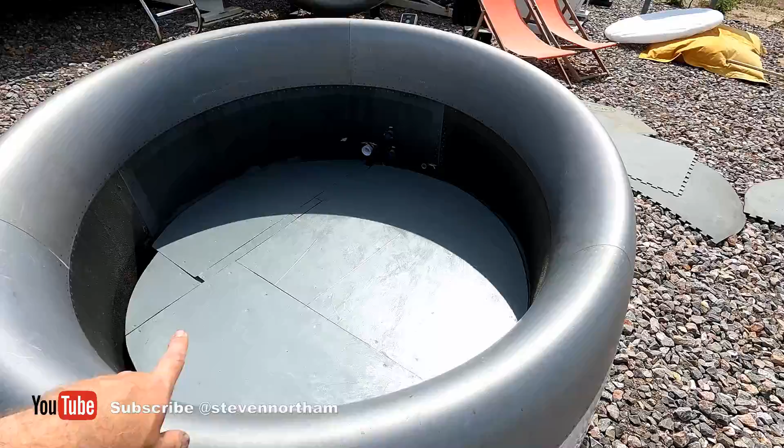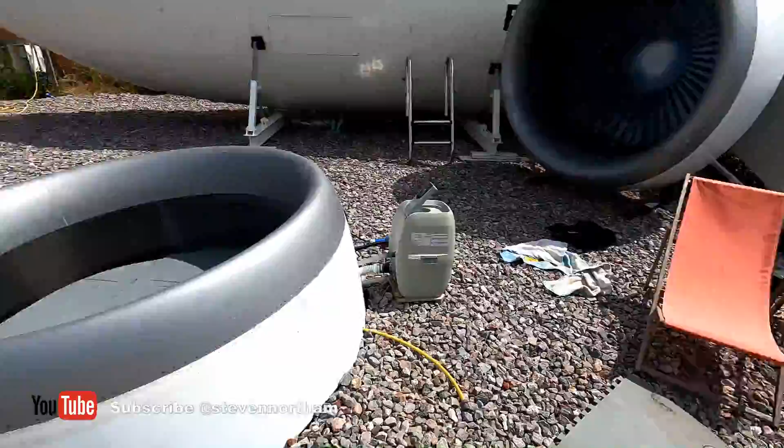Just starting to crack on, carrying on from the last video with getting the plane ready. I've done some weeding, cleared all the weeds, made it look snazzy. I've jet washed and cleaned up the hot tub, and cleaned up the jet wash bits and pieces. The plane still needs a blast, a bit of a clean. I've been sorting things out, painted the floor in there to stop it going rotten with any water that leaks on it, and I'll get the hot tub back in there and set it back up. That all seems to work fine, which is awesome. Just clearing up bits, and then I've been up on top of the plane.

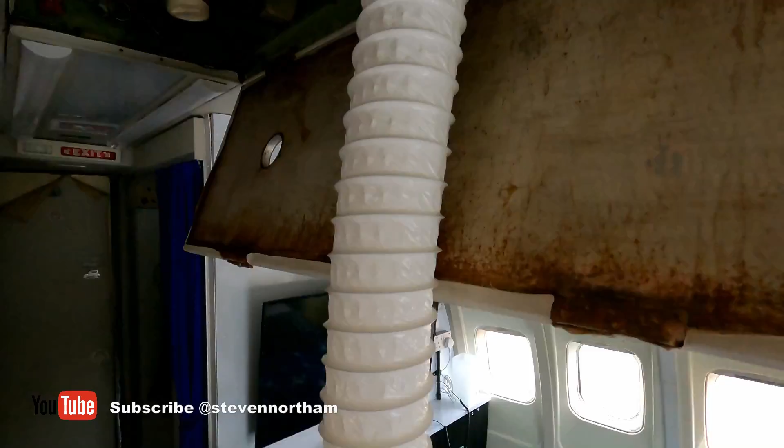One of the things I didn't do when we were filming the conversion was sort out the ventilation - hidden bits behind the scenes which weren't particularly interesting for the TV show. So I've put in a 100mm vent pipe with a mushroom vent. I've dropped the pipe in on top of the plane because it needs some ventilation, to get air flowing through it, especially if people use the shower. Luckily there was a nice hole already bored.

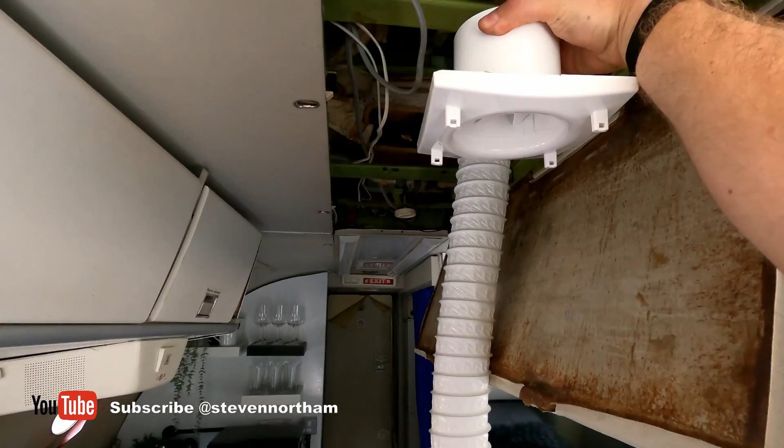Into the top of the plane, I assume for some sort of instrument which sat on it previously. I found nice little pipe adapters which fitted straight through the hole, sealed them in, and I'll put the extractor fan - just a Vent-Axia fan - mounted on the back here, sitting like that to give us a bit of extraction. There'll be a few more, probably a couple at the back and one at the front as well, just to get a good airflow through.

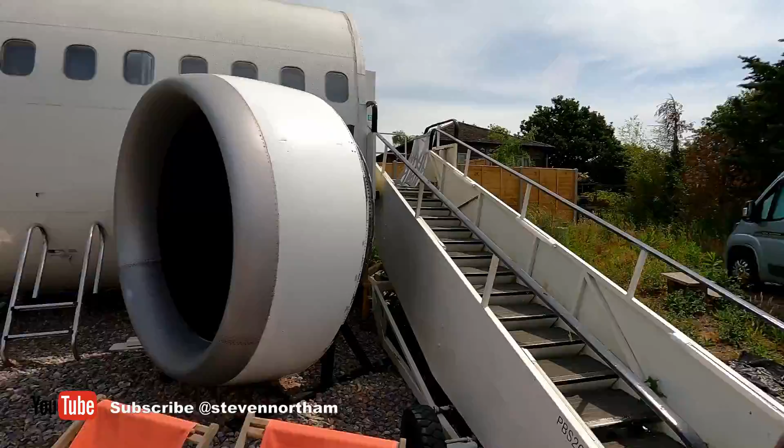Got the heat pump to go in, I'll probably do that in a second. Just really tidying up, sorting out and ticking off the list of bits which weren't done as part of the show, tidying up bits from winter which have been a bit weathered. Give it a good clean, get the hot tub in, and might be time for a beer in the sun in the jet engine hot tub. But again, I'll crack on.

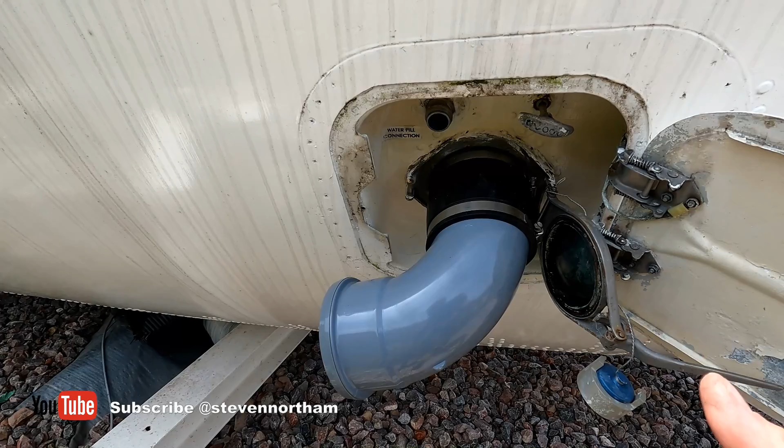In fact, I'll show you the toilet. I started the plumbing, and I have no idea if it's interesting to anyone, but I'll do a little video on it. So the toilet - this is where, when it's on the ground, they plug in and suck the crap out, essentially, I assume. Luckily it's about 110mm, which is the waste pipe size, so I've got a rubber seal around that.

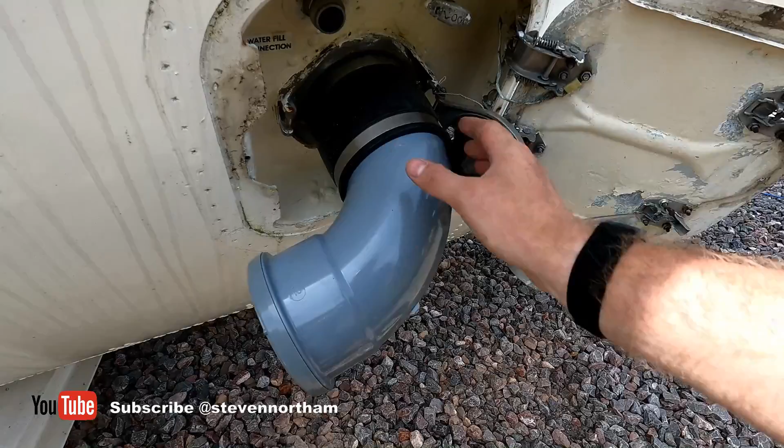That fits on nicely. There's a water inlet which I'm going to try and use for the flush system. So I have a solenoid valve which will flush water through, and that's quite nice and easy to keep water consumption to a minimum and hopefully get the toilet working as it should. But again, I'll vlog that as I start to strip it out and work it out in due course.

So the hot tub is now on, back in business. I have got to do the ladder because that's not fixed to anything - for the TV show it was just stuck there to look cool. So I need to make some little brackets at the bottom and top to get that secure. But I've cleaned it out, dropped the chlorine chemicals in, all that stuff. So the hot tub is back on, it's looking cool.

Obviously the sun is out today. It's going to look awesome once it's all done and sorted out. But time to crack on with the loo - that's my next project.

So another day. It's quite overcast today, which is actually quite nice - not so hot working.

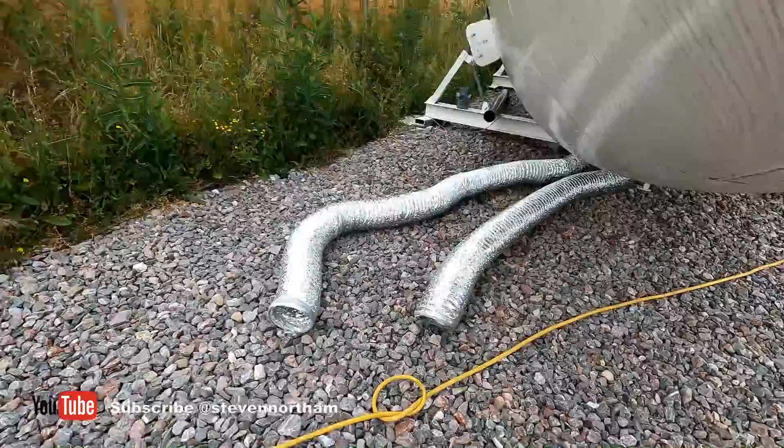I am cracking on with project plane toilet and other bits and pieces. As I showed you before, I've tidied it all up. The hot tub's all sorted, that's all working. I've moved the air conditioning heating system vents for the hot and cold out via where the landing gear used to be.

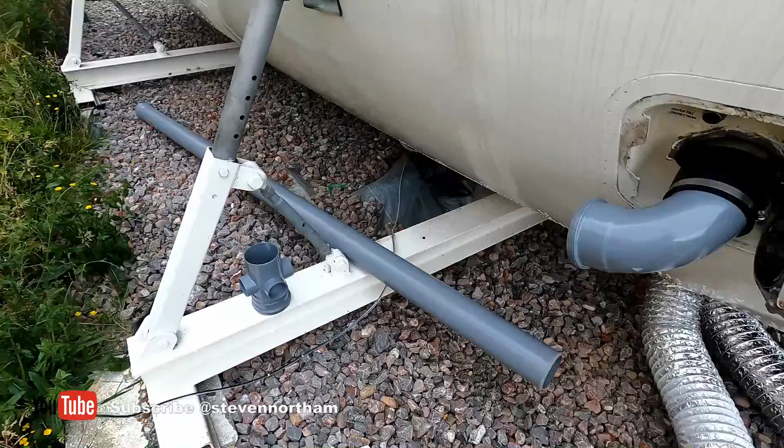So I'll mount all that nicely, trim these off, and then as I showed previously, I'm just starting to work out the loo. I've got soil pipe, which is obviously going to come out there. I think originally I said I was going to try and use the original flush valve inlet, but that's going to prove tricky because connectors for that cost an absolute fortune, with everything being on a plane. But piping I'm kind of sorting, and I'm working out a very butchered system to make this loo flush and function again, so I'll show you what I've done so far.

We'll try to work it out. I've turned the power off for a bit, so it's a bit dark, so I'll put a head torch on. It's probably going to flicker, I'm not sure.

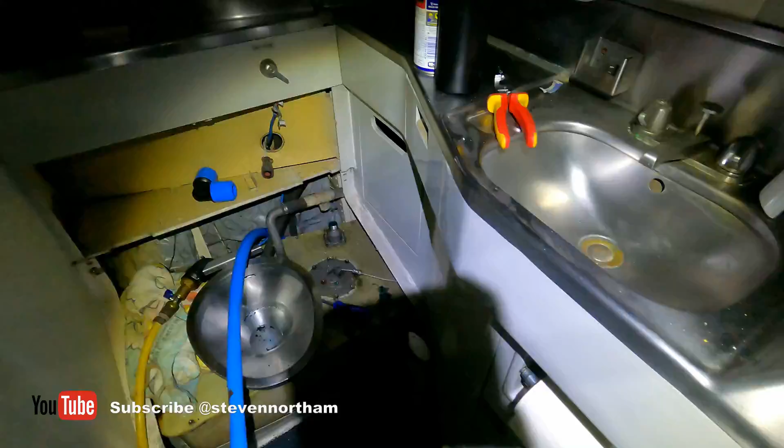So I've run a hose pipe in here to test it with water, and what I've done thus far, I've got a pipe that goes down to the hold, which would be the water inlet for the toilet, and obviously the sink as well, which I'll do shortly. I've hooked up a hose just to test it currently.

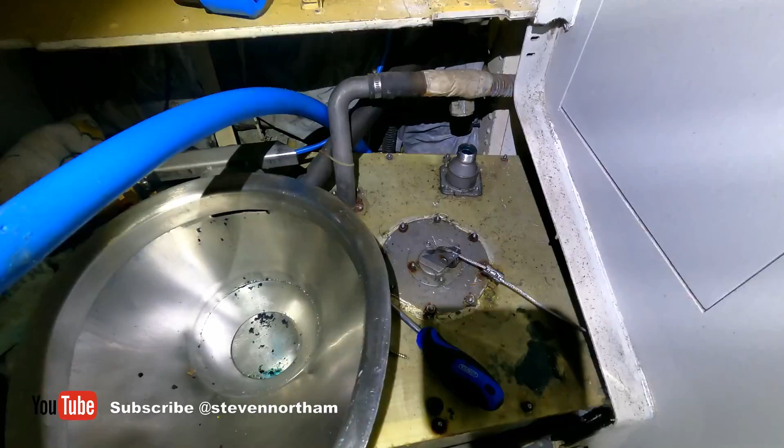Obviously I've stripped it all back and cleaned the pan a bit, it's very corroded, needs a good scrub still for some descaling. But basically the port over there is what goes to the outside where the water inlet is to flush it, and that flushes the entire tank. So originally when you use the loo, it stores it in the tank. When you're done, they pull the lever and it lets the contents out, and they pump it through with fresh water to clean it out.

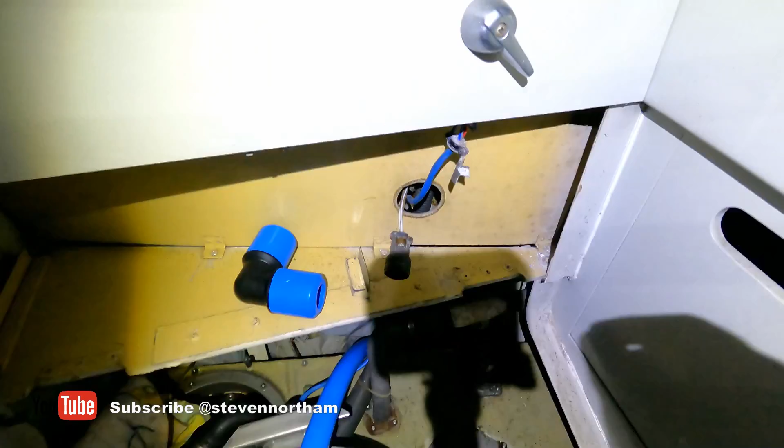So what I'm going to try and do is feed it with fresh water to the tank cleaning and the flush, all off a push button solenoid valve. Originally it was like that - it has a mechanical and electrical flush system which times it, so I can time how much water runs through the flush. But all I want to do currently, I'm going to move that pipe.

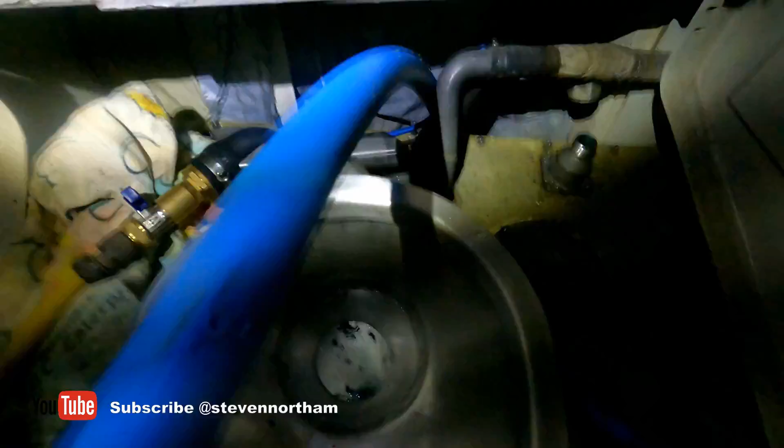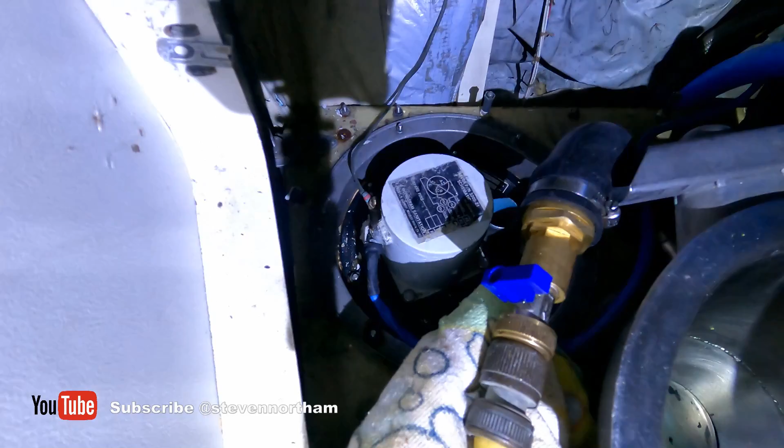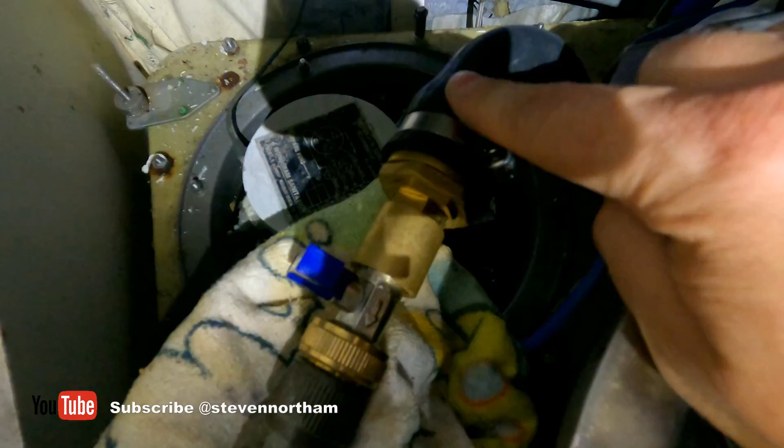I've hooked up, you can sort of see this without getting the camera in the way, a hose pipe to the back of the flush. Originally there's a motor in there, sort of see that - there's a pump which pumps water from the tank into the flush system, but I'm not going to use that, so I've taken it off this Jubilee clip. That goes straight into the back of the cistern. It should run water all the way around the pan and flush it down into the tank in theory.

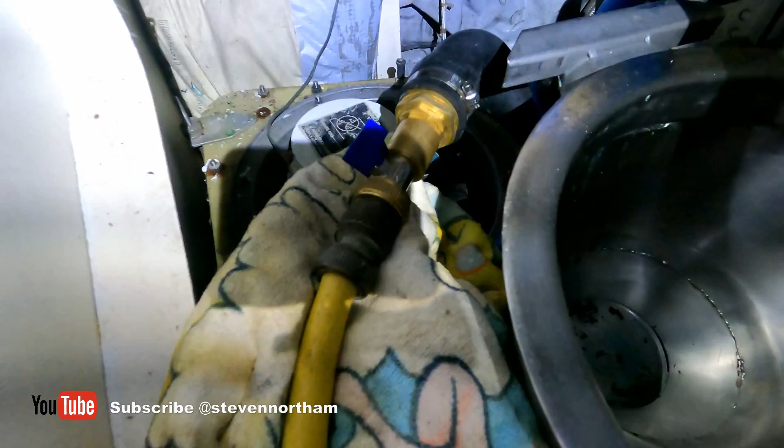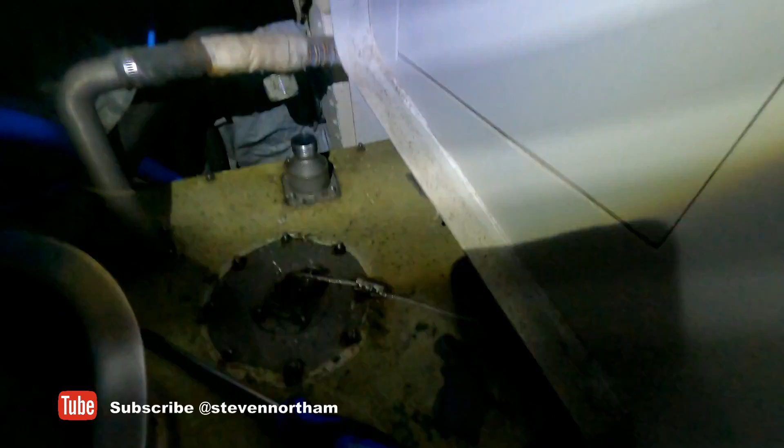I've no idea if that works, so I've hooked up the hose pipe with a valve. I'm just going to pump water through, test it, and then see if the release works the other end. There's a handle on the outside of the plane which pulls this lever, and that pulls up a valve at the bottom of the tank and empties the tank, in theory. So what I'm going to do is pump a bit of water around it, see if it flushes as such, and then see if it empties out the back.

If that all works, it should be quite straightforward to make the plane loo work again. So that's the grand plan.

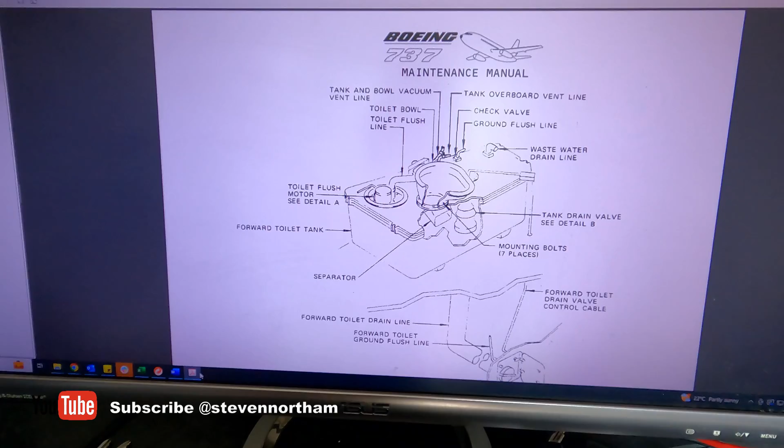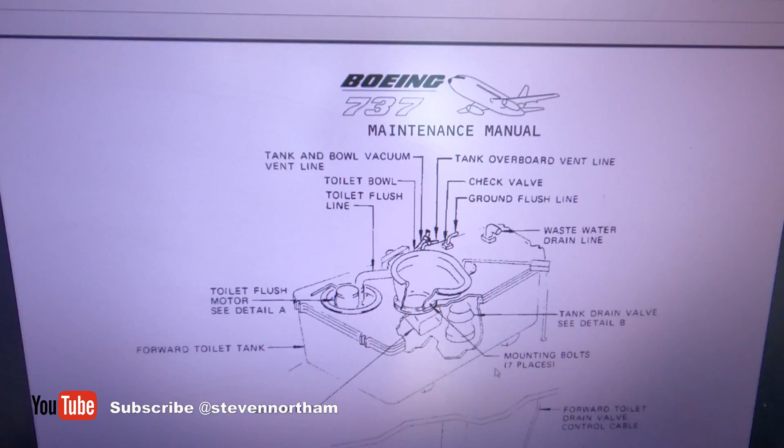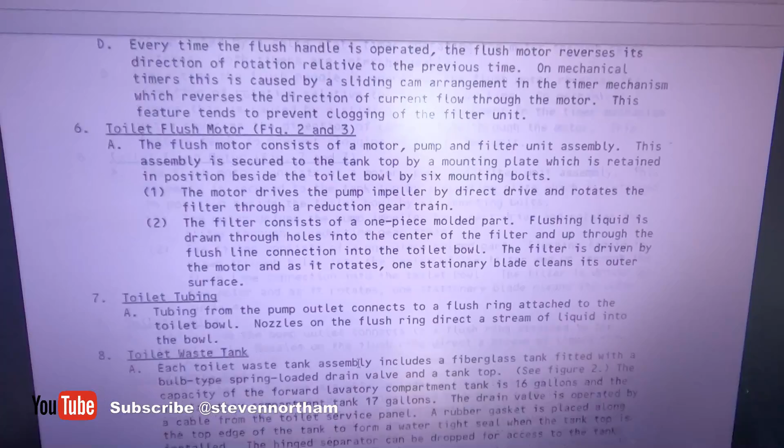So with the toilet, I was just pondering, would I be able to find any details on the internet about a loo from a 56-year-old 737. Turns out, with everything else, you can find anything you want on the internet. I actually found this on WikiLeaks - it's the complete maintenance manual for a 737-200, which has everything on, like how to fix it, the wiring. It's an absolutely colossal manual.

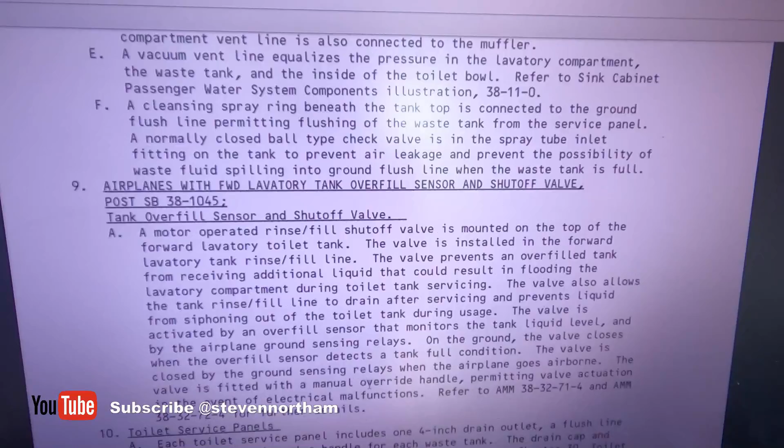It's got the flush system, but nicely it does have, scroll back up, the sort of details of the loo, the system, how it works, etc. I think it's got, yeah, like the flush, the whole lot. So that might make life slightly easier. But I'm going to go strip the cover off the loo, etc, and then start working it out now.

Alright, so I've turned the water on. It's not pissed out everywhere yet. So if I put a little valve on the hose pipe just to test it - it's leaking a bit, so I'll try and, oh crikey, always too, I don't want to flood the plane. But if I turn the valve, I've not put it on full blast because the water pressure is really high, which is good. It should flush the loo as such, so we'll just give it a little test. It looks like it's working.

It looks like some of the little outlets are probably a bit blocked still, so it needs a good scrub.

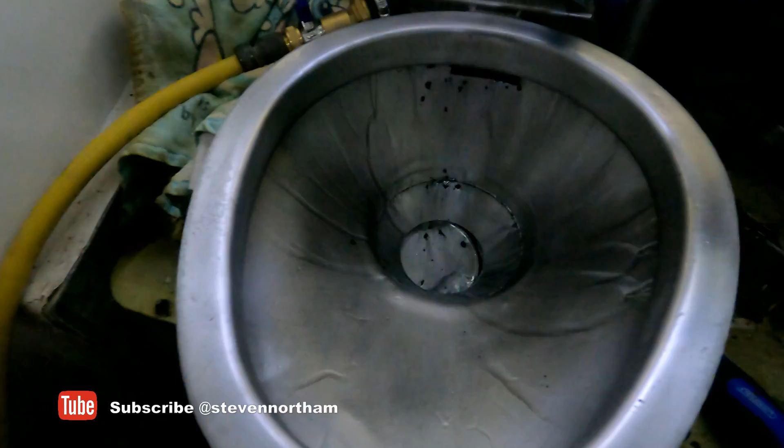It will definitely flush, definitely works. Let's try emptying it outside, give that a go.

Hopefully when I pull the lever, it'll open the valve and dump the water out, and then in theory the toilet should work quite well. So let's just turn the water off, because I'm paranoid about flooding the plane accidentally.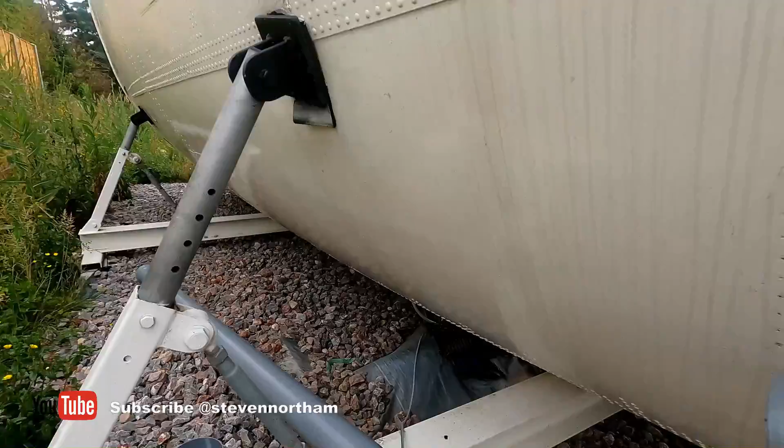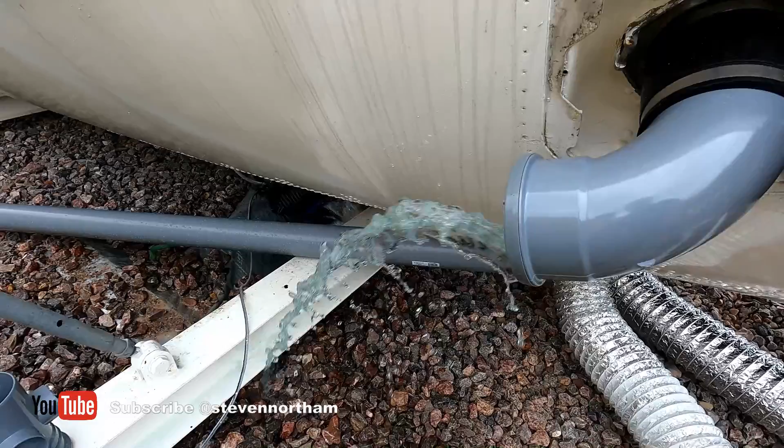So in theory, move my waste pipe. When you pull this lever, it opens the valve in the tank and water should flood out. It's definitely making a noise. Yep, that clearly works quite well.

So I shall crack on with the controls, the valves, bits and pieces, and see if we can automate the loo working by pushing a button, and we'll go from there.

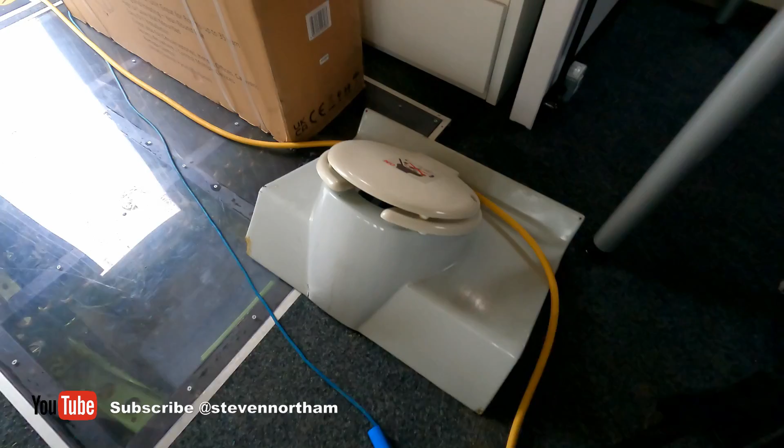Before anyone asks, that's not what the loo will look like when it's finished, obviously. This is the surround from the original toilet, the original loo sink, etc. It's fiberglass, so quite easy to sort of do up.

I'll fill in these little gaps, the fiberglass, give it a sand, then I'll probably coat it in a nice bright white, clean 2K paint, and do the same in the toilet and recoat the work surfaces, bits and pieces, and it'll all look very clean and tidy. Anyway, that's the plan, so I shall update shortly.

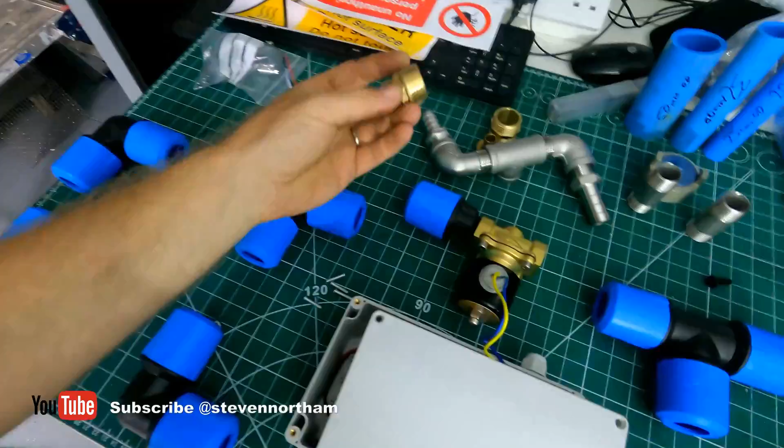So I think I've got a working solution for the plane loo flush. Loads of fittings and playing around with all sorts of bits and pieces. One annoying thing was that the plane, as it's built in America, uses the American pipe fitting system, not BSP like in the UK, so I think it's NPT. I had to order adapters to fit onto the original fittings, but that's quite easy.

So I use 25mm mains water pipe coming in to the plane, and it's going to go through all this. I've got a 12-volt solenoid valve and a push button switch, which will activate a little timer circuit. Every time you press the switch, it'll run water through via the valve for a set period of time to flush the loo, in theory.

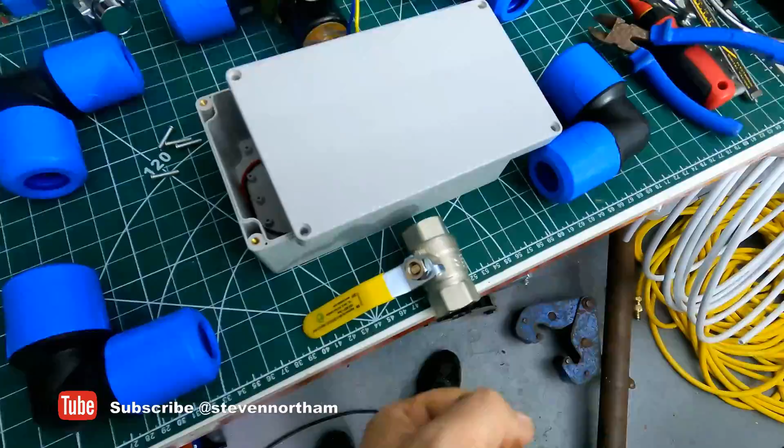That's the idea, I've sort of laid out how I'm going to do it. Got a manual valve as well, so if you want to manually flush the loo from the plane hold for maintenance or whatever, I can do that. I'll put it in a box with a transformer, because that's 12 volt, so it's all low voltage, all safe.

I'm going to wire that up, plumb all this together, mount it on a board, and then feed it up to the plane loo, and hopefully that'll be a solution to make the plane flush. So we shall see if it works in due course.

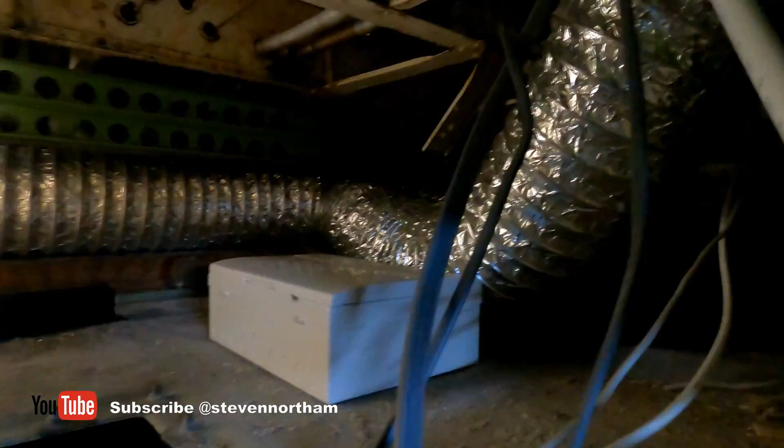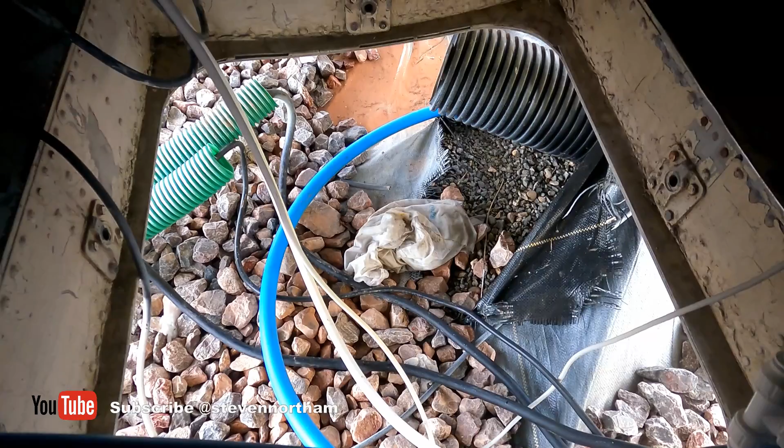There's a hatch which goes outside, which is where I'm running the water, power, internet, etc. in. But I think I've sort of hooked up the loo to test it. I've built a little box with the 12 volt transformer and the timer circuit in there, powered that on. That's rigged up over here to a solenoid valve, and then I've rigged it up to a 25mm water main coming in.

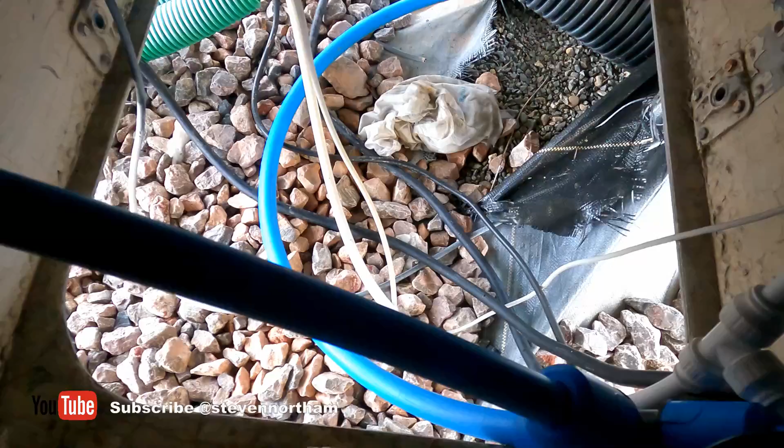Loads to do under here, but you can see over there the blue pipe that goes up to the loo, along with a cable for the push button. So I'll whiz back upstairs.

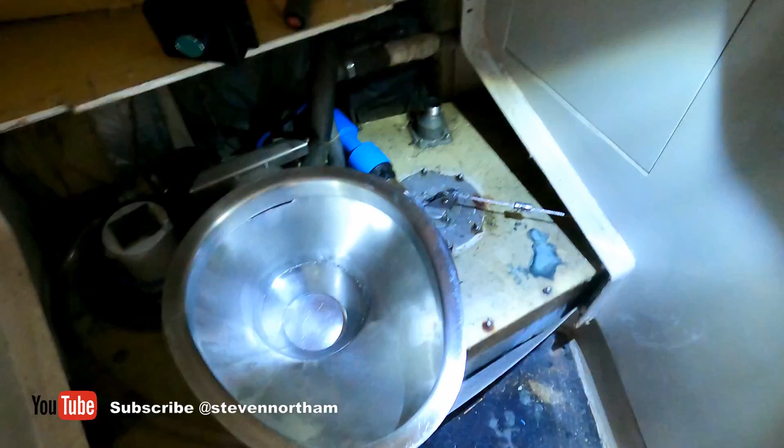So back up in the main cabin, in theory I can flush the loo now. It should just shoot outside the plane. So we'll try it out. It's either going to work or it's going to piss out everywhere and leak. That's kind of unknown. So again, I've cleaned the bowl with a good scrub.

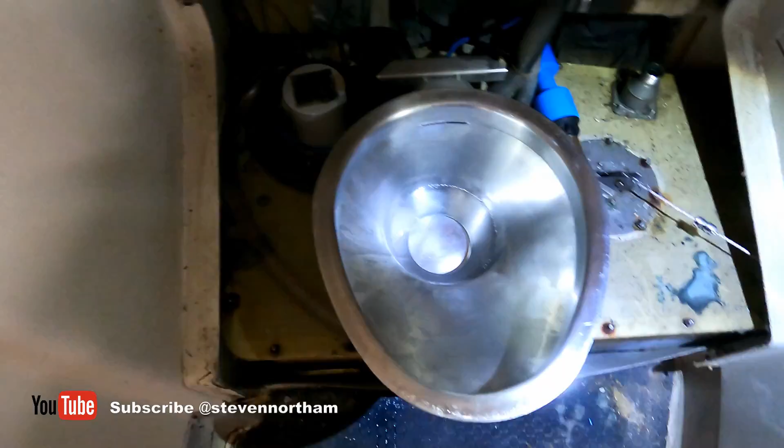The release valve to let everything out of the tank is constantly on now, so it should just dump out the side of the plane. I've rigged up the water feed coming up from below, runs round in this pipe, and then I've rigged it onto the back of the original flush.

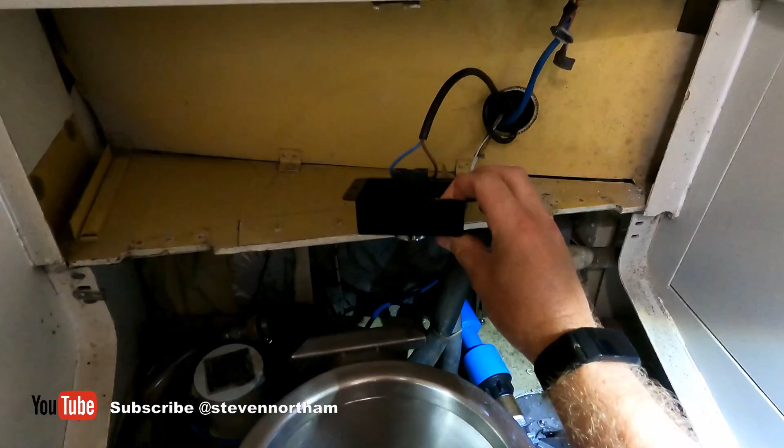So in theory it should flush the loo. That's the cable I've run from down in the hold, it's just a push button which goes to the timer circuit. I'll mount that up nicely in due course, but for now, in theory, push the button and the toilet will flush. Nice.

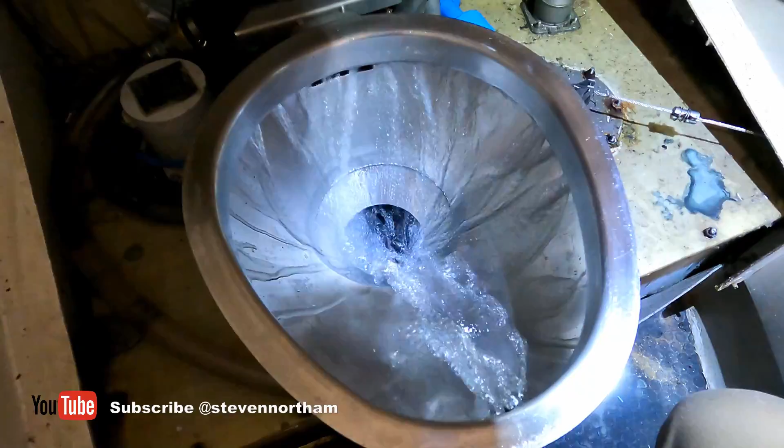Spot on, so it flushes for a set period of time. Oh, it's come back out, which was the idea. I can adjust that, work out the amount of water it's using and the flow rate, but that should work absolutely fine. That's one headache solved - it was going to be a challenge if I couldn't get the loo working.

I'll update again shortly as we move on to the next few bits and pieces to complete before I can open. Talking about opening, there's a huge amount of people waiting to come and book it. I've had a lot more press, dropped in some links recently, and it's getting quite exciting.

It's really time to smash out all the bits and pieces, get the waste treatment plant in, which we started - you can see the digger over there. We're just going to start clearing up, moving some of this kit. I'm going to put the tank over there and make it look cool. But I shall update again shortly.

Very quick last little update. Another weekend just gone, been cracking on with the plane. I've moved, open the door, the stairs - so I've got a ladder to get in at the moment. The stairs are around the corner, so I'm going to paint and refurbish them. You can probably see them out there, just moved them out of the way for now.

Most of the plumbing is sorted now, so we're getting there. I've got running water and drainage for the kitchen sink and shower, that's all plumbed in, but I haven't finished wiring it in to test it out. For the loo, I've got a light in there now.

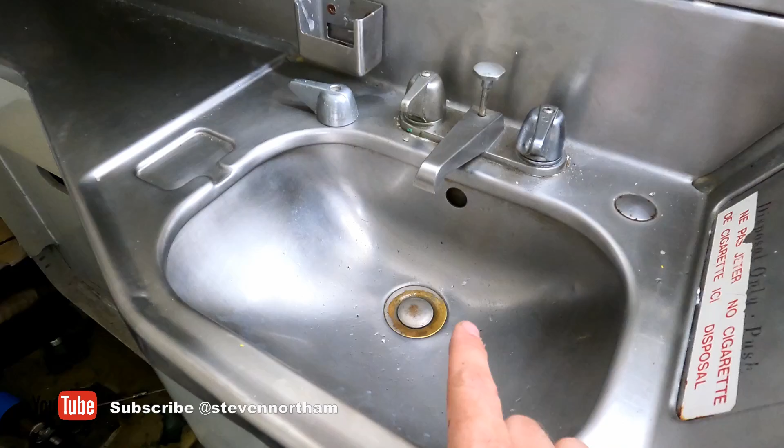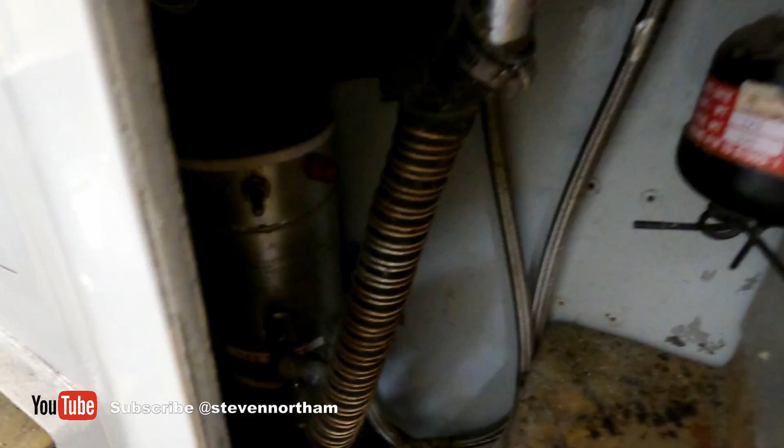Sink is plumbed in and working for drainage. Haven't plumbed in the taps yet, but it doesn't seem too complicated - it's just plumbed in down there, so there's a bit of plumbing to play around with. Loo, I think it's all working. Yeah, flush - nice, super powerful flush. I think we might reduce the amount of time it flushes, but it's working for now.

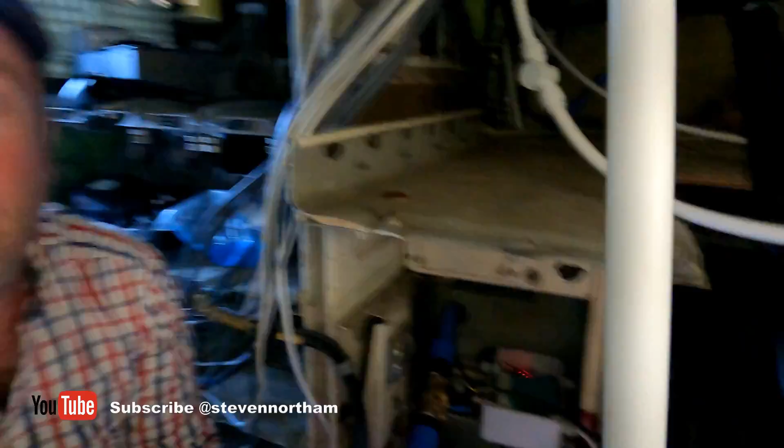I'll shoot downstairs, just showing the avionics bay, sort of the plumbing bits and pieces, and I shall update again shortly. So down in the avionics bay under the plane, where I'm doing all the wiring and plumbing, it's all hidden away - I think I showed before. So the toilet flush systems are over here.

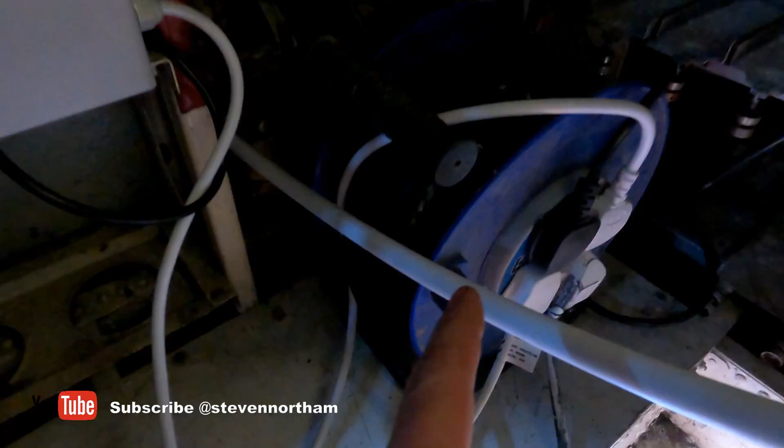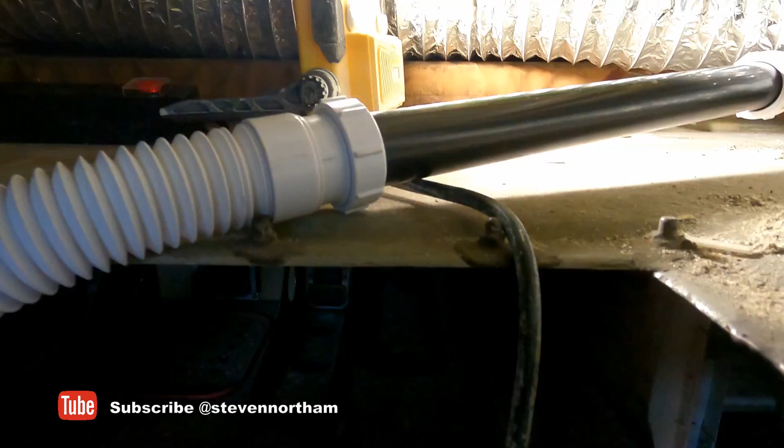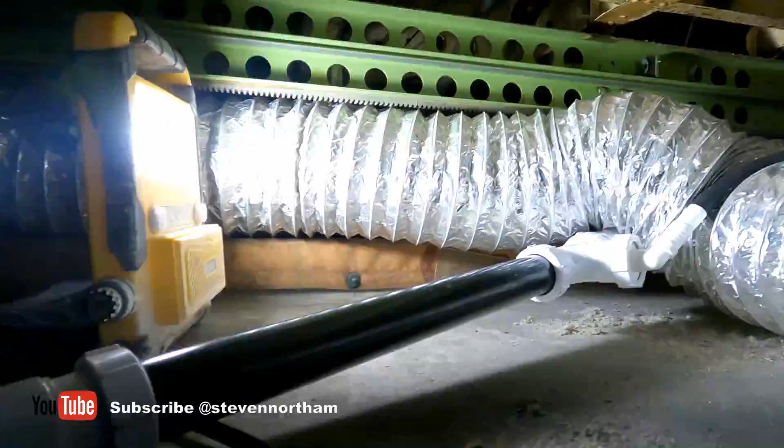Currently the plane's just running off the extension lead down under the ground. I'll fill this hole eventually once all the services are in, but it's going to be embarrassing for any plumbers out there - my sort of Frankenstein type of plumbing, which goes to the sink over there, the loo behind there, that's the shower. We've got the aircon drip feed thing going there too. But I've just used bits I've had kicking around from other builds, stuff left over really, so I haven't had to go and buy a lot of kit or pipe.

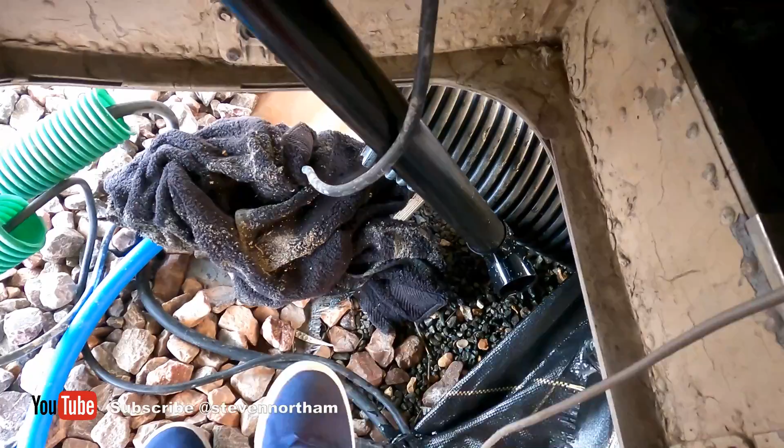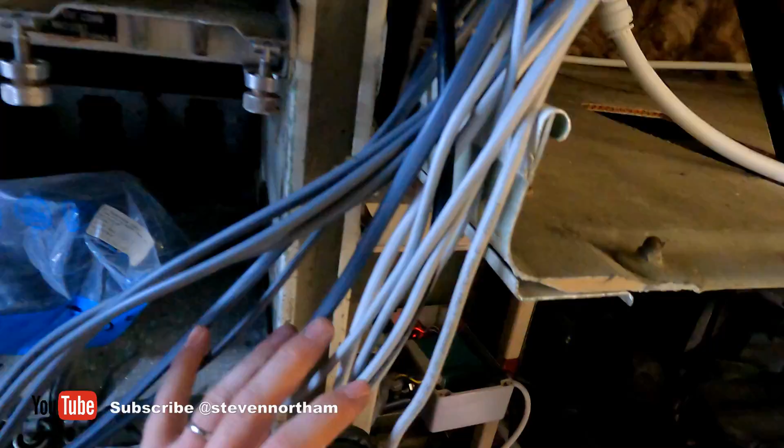I think I've glued all these. At the moment it just shoots out the side, but that'll go down to the waste treatment plant shortly once that's plumbed in. But heating, aircon works, kitchen sink, shower, loo almost works, so I've just got all the wiring left - you can see tons of wires, Ethernet, mains, HDMI leads for the TVs, etc. So still a fair bit to do upstairs, but I'm sort of on track.

I reckon another month's work over August, and when I've got holiday time off to chill, I'll crack on with the plane and get it all done and ready. I shall update again ASAP.